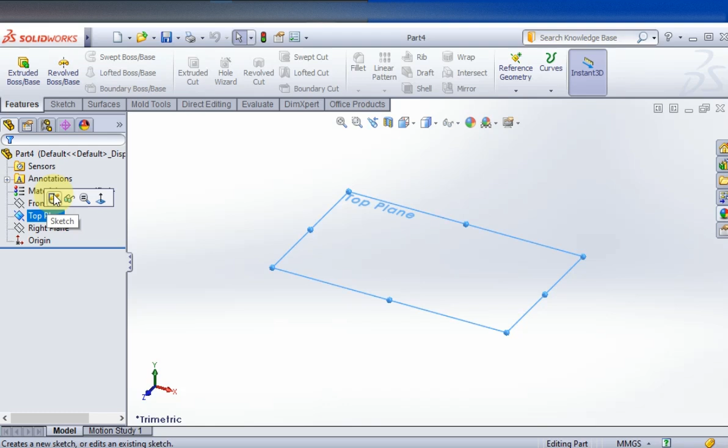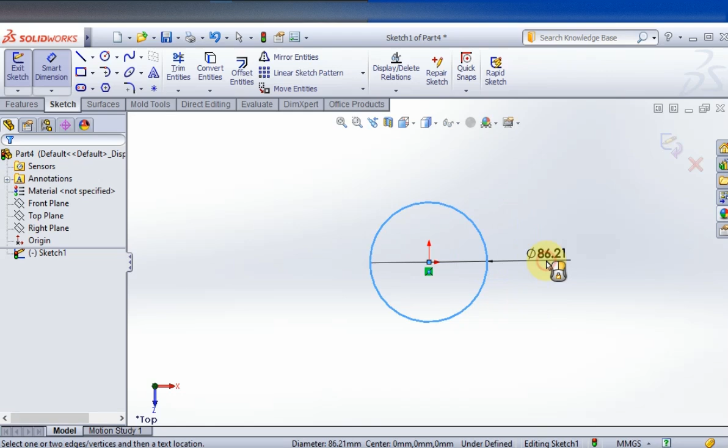Go to top plane, sketch, click circle from origin. OK. Smart dimension 59.9. OK. OK. Exit.

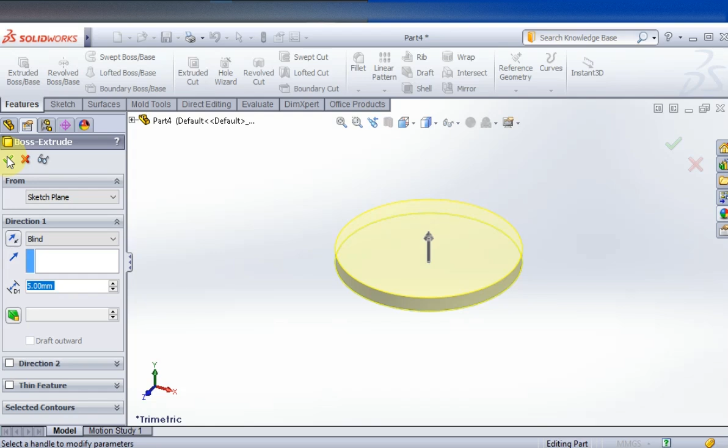Extruded boss base. Here depth should be 5 mm. OK. Now this is our first body.

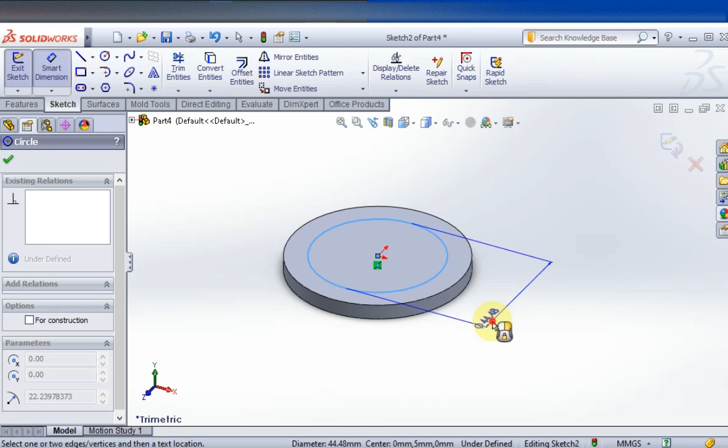Click on this face, sketch again, circle, smart dimension 49.2. OK. Exit again, extruded boss base. This time depth should be 2 mm.

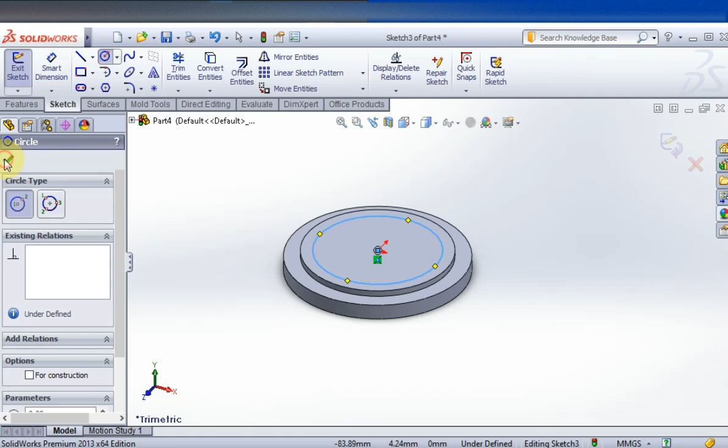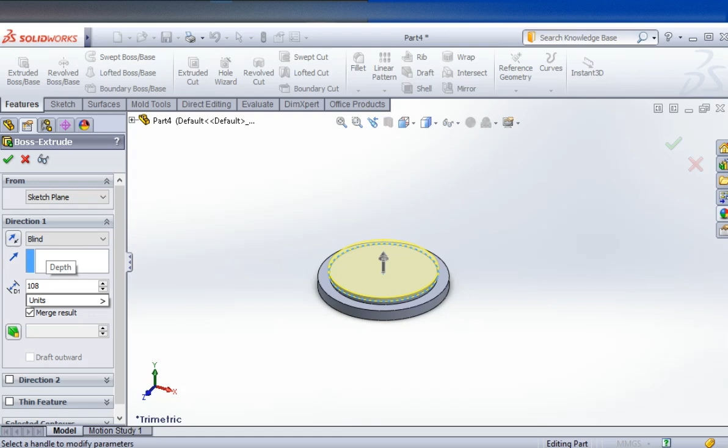OK. Now again click on this face, sketch, circle. OK. Smart dimension, this time this should be exact 50. OK. Exit, extruded boss base. Depth should be 108. OK.

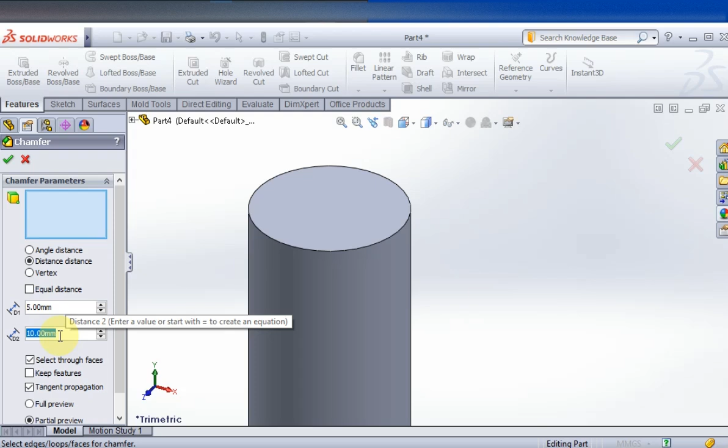Click here, chamfer, distance, first distance, five, second one 1.5. Here select this edge. OK.

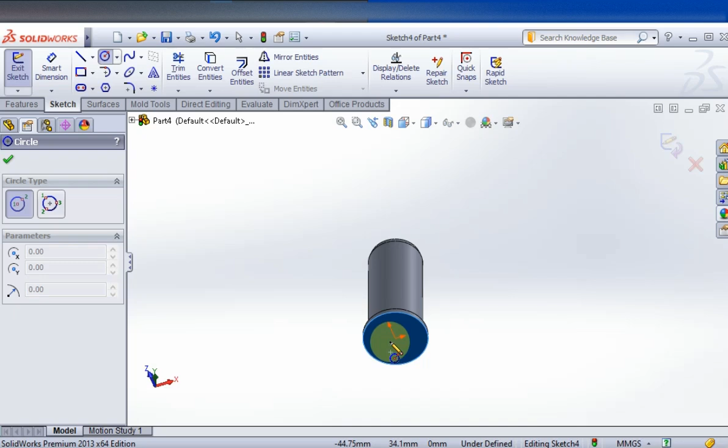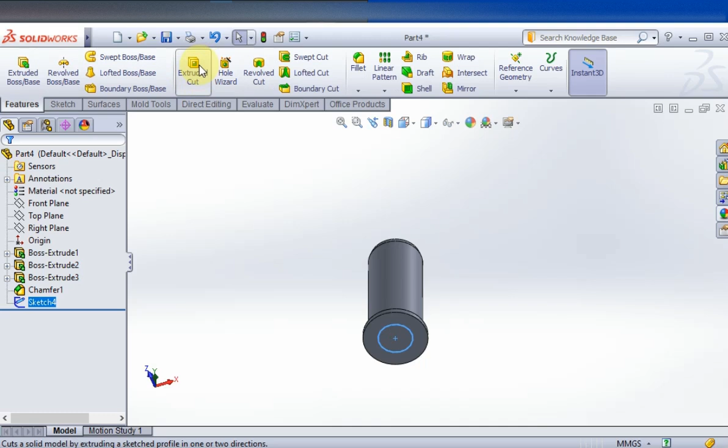Click on this face, sketch, circle. OK. Smart dimension 16. Radius, so diameter should be 32. OK. Exit. This time extruded cut all through the body. Here through all. OK.

Now look. Now we are going to cut a slot here. To do this, we need to click this front plane, show.

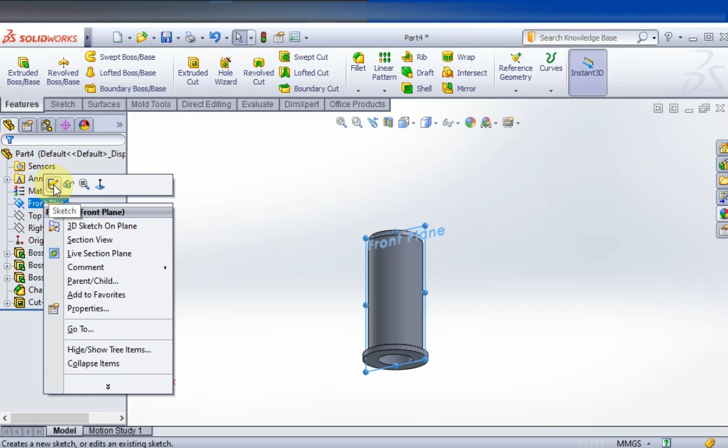Here click right, sketch. Again click normal to. Or you can either hide this body. Here click this one.

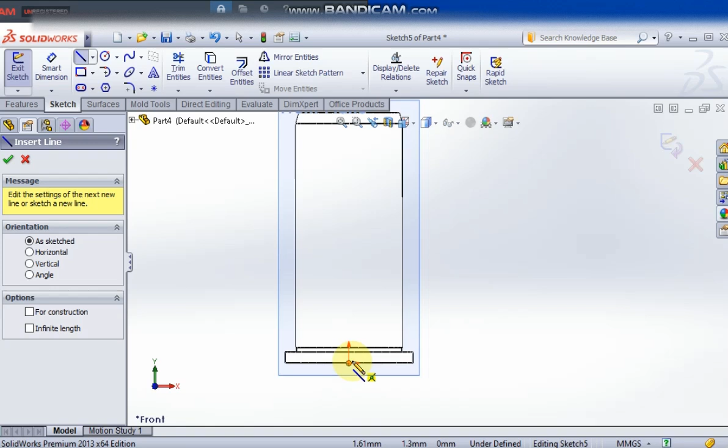Click line, click on this, bring your cursor to this origin and slightly move above. This should be in a line. Click here and here, right click, select smart dimension,

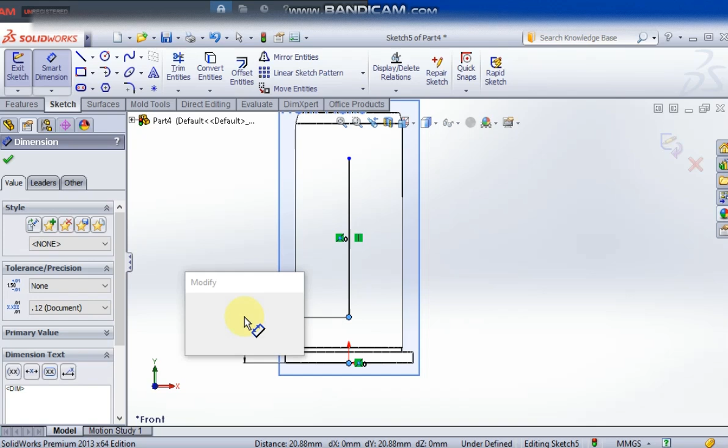this origin and this point, 17. Total distance should be 75. Okay,

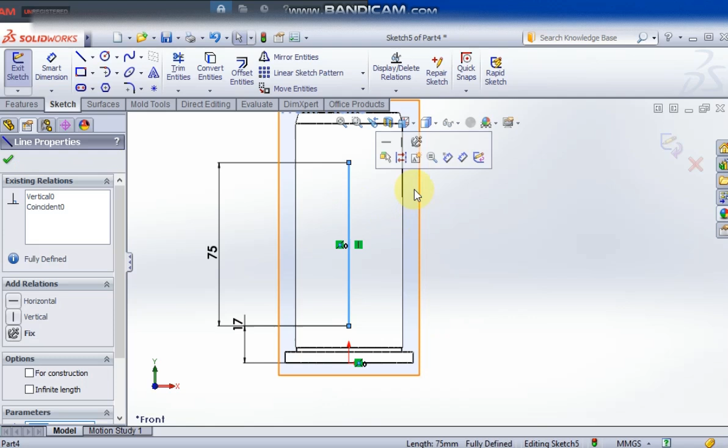click on this line, offset entities here 7, and make sure this cap ends should have an arc selected, so we can get this arc. Okay,

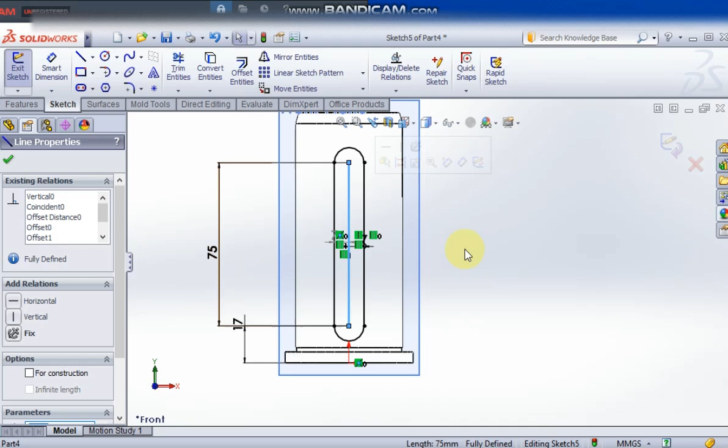now delete this center line, press delete button on keyboard. Now exit, extruded cut in feature tab, reverse direction

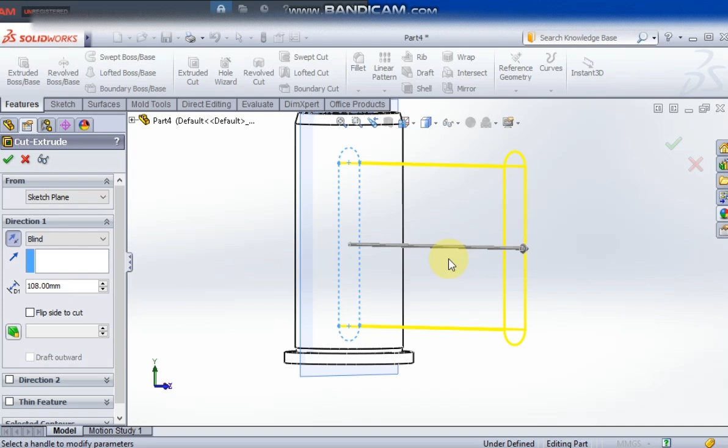here up to body and select this body, or you can keep it simply blind and don't worry, just click OK and show body here. This is our turret sleeve, almost done.

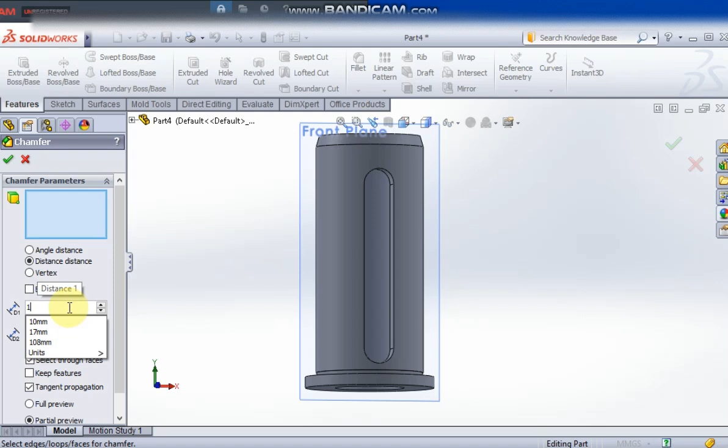Let's make a chamfer here on this slot. Click chamfer, distance 1 mm, both should be 1 mm. Here select this one, outer edges, this one and this one. Okay,

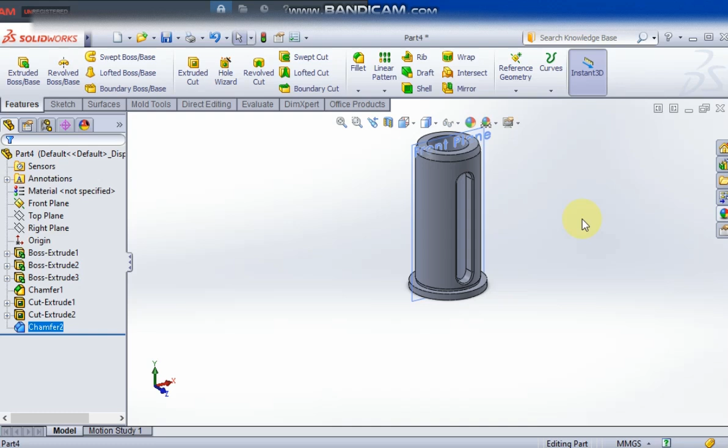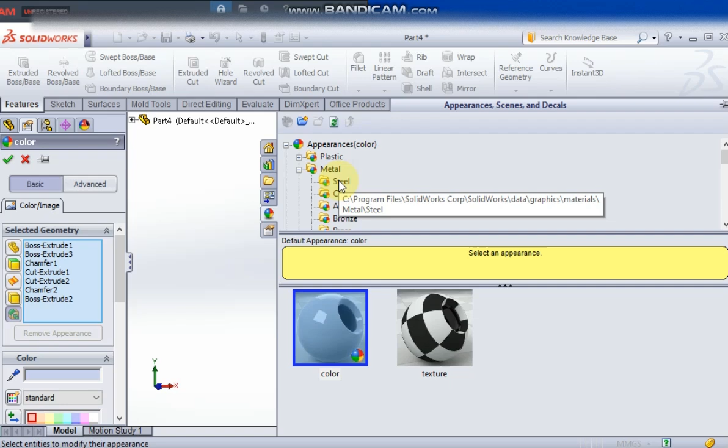hide this front plane. Here click and drag to select every body. Now right click, appearance, body, here metal, steel, select, let's select this matte steel.

Okay, look, this is our turret sleeve. Okay,